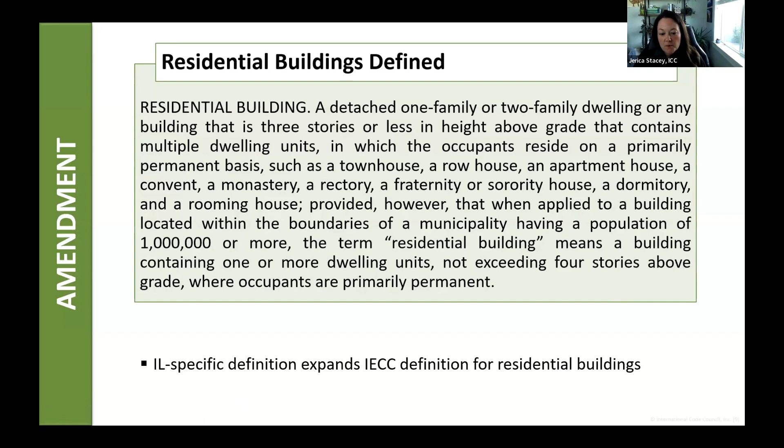When we're thinking just about the 2021 IECC, I think it's important to understand some of the energy savings and emissions reductions that we get just from the model energy code. So every code cycle, the Department of Energy through Pacific Northwest National Laboratory and their Building Energy Codes program, they issue a determination. They look at the most recent version of the energy code and compare it to the previous version to assess whether or not it provides additional energy efficiency.

When we're talking about the 2021 residential provisions, that determination found about a 9% increase in energy savings over the 2018 IECC and similar carbon emission reduction savings as well. So this is really important for states that do have additional energy efficiency goals or have some kind of climate action plan or other carbon conscientious policy.

And when we compare the 2021 to the 2006 IECC, which we typically use as a baseline - it's considered to be one of, if not the first modern energy code - we see about a 40% increase in efficiency between the 2021 and the 2006.

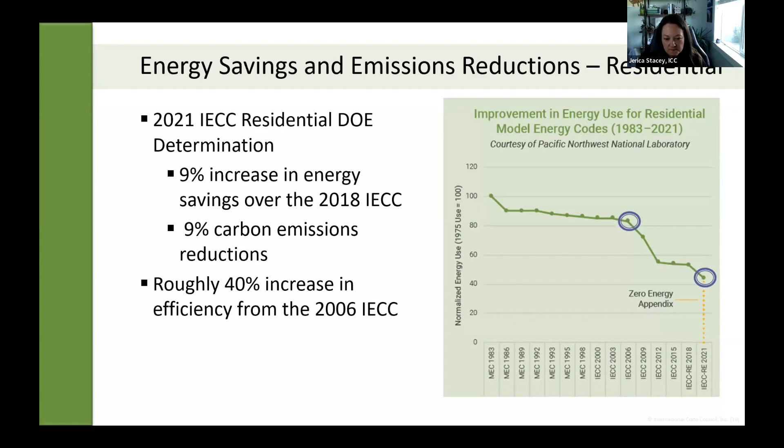Well, lucky for us, DOE through PNNL also did some analysis on the Illinois Residential Stretch Energy Code provisions as they were first proposed to be included in the residential portion of the code.

Compared to the 2021 IECC, the Stretch Energy Code will provide about 9.6% energy cost savings, life cycle energy cost savings of a little over $2,000 - we're talking about a 30-year period for those life cycle energy cost savings - and avoided future retrofit costs of about $6,500.

So those retrofit costs are going to come into play when we talk about some of the provisions that don't necessarily impact the energy use of the building, but they do impact carbon, and future owners will have to cover that cost if they were not included within the Stretch Energy Code.

So I'm going to put a link to that analysis. It's available online if you care to dig a little deeper into what that analysis says and how we're coming up with these values.

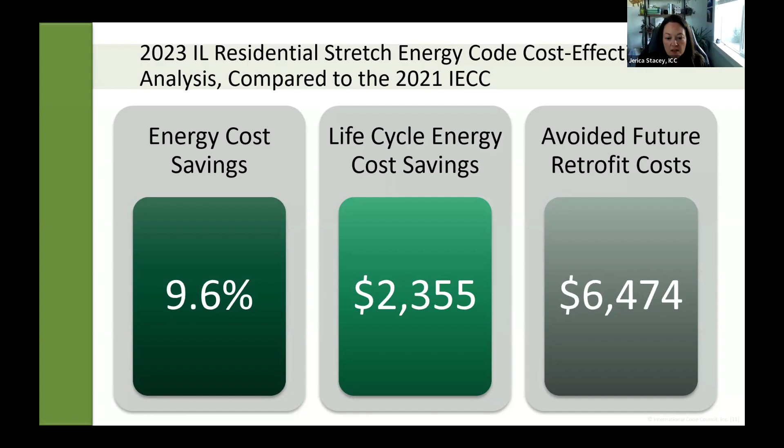In addition to those values, this analysis also estimated that over that 30-year period, the energy savings are collectively going to save about $2 billion in energy costs, and they're going to reduce statewide CO2 emissions by over 14 million metric tons, which is equivalent to just under 3.1 million cars.

That 9.6% energy cost reduction that we saw on the previous slide, that's going to equate to almost $248 of annual utility bill savings, so an average of that.

So ultimately, what this analysis shows us is that the Stretch Energy Code is going to be more efficient, it's going to result in more affordable housing, and it's going to be designed to help us achieve some of those energy efficiency and health-related goals that we might have.

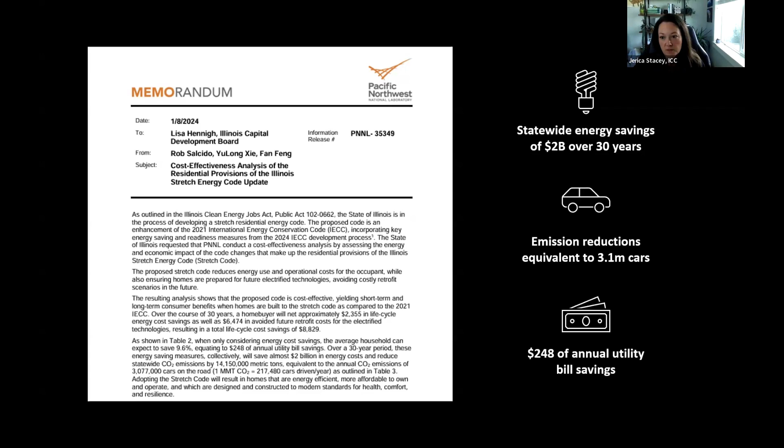And why do I think this is important? I always take my 2 minutes on a platform to discuss why I actually think that these energy cost savings have a really big impact on our community.

Every 5 years or so, there is a residential energy consumption survey that comes out. The last one, we're still getting continuous data from this currently, but in 2020, we found that about 27% of US households, which is about 34 million US households, reported some difficulty either paying their energy bills or they kept their homes at unsafe temperatures to be able to afford to pay their energy bills.

When we look at the same survey that was done 5 years previously, we do see a reduction in those households that are saying they're having difficulty meeting their energy bills. This particular survey attributes a lot of that reduction in energy costs to the continuous energy savings that the energy code provides. So each code cycle, we see those improvements in energy efficiency.

Those are having a really big impact on us across our communities in being able to afford energy, the costs associated with the energy of our homes.

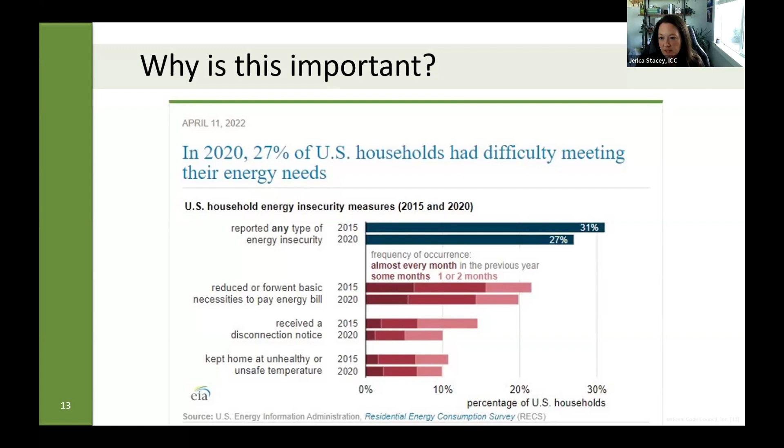A more recent study done by ACEEE found that 1 in 4 low-income households spent over 15% of their income on energy bills. And this is really a significant finding because what is considered to be a severe energy burden is 10% of your income.

So 1 in 4 low-income households are well over that severe energy burden of 10%. We see this across a number of jurisdictions in the US. Chicago was one of those, and Chicago is a little bit over that average, that 15% average we see across the US, but there are jurisdictions reporting up to 26% of their income on energy bills.

So any way that we can actually reduce that energy cost, which we can do through updating or adopting a stretch energy code, is going to help our communities be more affordable. Links to these studies are going to be in the resource section of the PowerPoint as well.

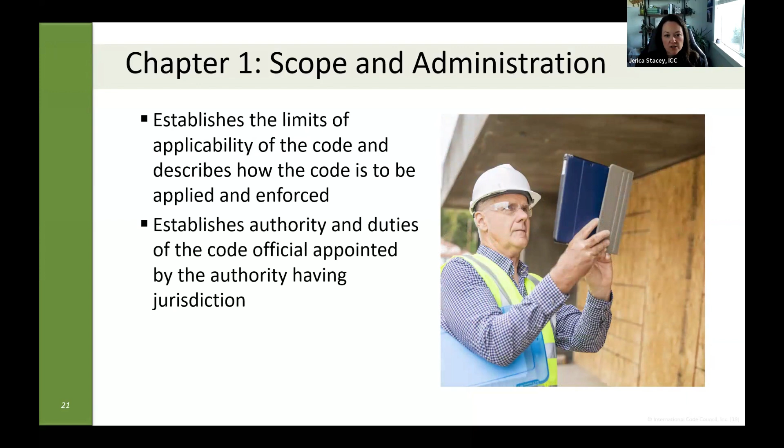So chapter 1 is our scope and administration chapter. It's going to establish the applicability of the code, so this is where you're going to find that intent section we already discussed. It's going to include details on how the code is applied and enforced, including the requirements that apply to us as code officials — what do we actually need to be looking for as we're doing our plan reviews, and what inspections should we carry out to enforce the energy code. It's also going to include those responsibilities of the design professionals, so what needs to be included on those construction documents.

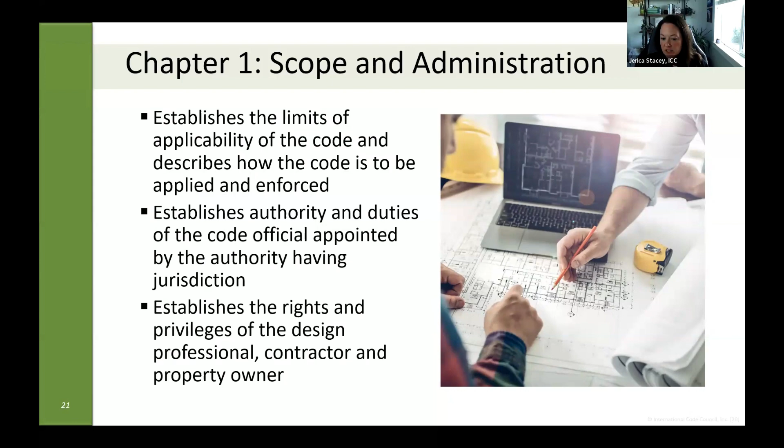There are just a few amendments to hit on within this chapter. The first is that energy code enforcement is going to be left to the authority having jurisdiction regarding the procedures it wants to use to enforce the energy code. So the AHJ, or the Building Code Department, is going to establish the procedures for enforcing the energy code, the stretch energy code, because as we already talked about, this is going to take precedence over the statewide energy code.

We also find an amendment that tells us our compliance submission options are expanded. Typically in the 2021 IECC, we would just have a list of compliance materials we can include — worksheets we're used to, computer software printouts, manuals, analysis like load analysis, that sort of thing, that we would rely on for compliance. Well, the stretch energy code says we can also accept the seal of the architect or engineer working on the project, or we can accept a REScheck compliance report. So if we are complying with the energy code using the prescriptive path, we can already submit a REScheck compliance report to see that total UA, but the stretch energy code is going to actually list REScheck as a compliance submission option.

We're also going to find some amendments to the above code program. Typically we would just say it's going to be up to the code official or the authority having jurisdiction to name the programs that they will allow as above code programs.

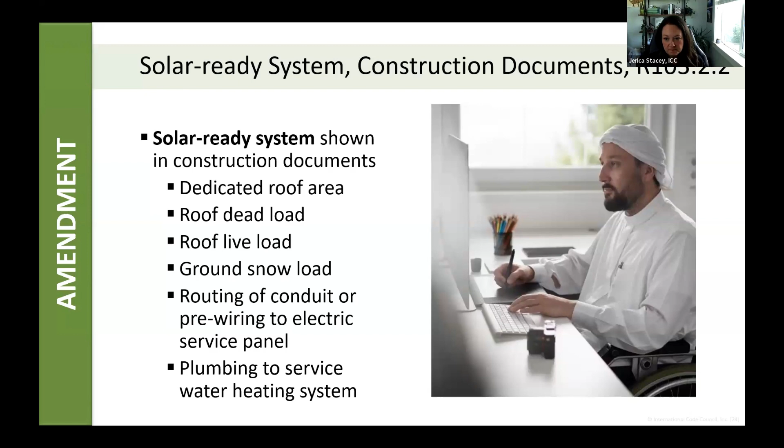So I'm kind of beating to the punchline here - we are going to require solar readiness in the Illinois Stretch Code. To support that, our construction documents need to include details about the dedicated roof area, our load details, where we're going to expect the routing of the conduit or that pre-wiring, and then plumbing to our service water heating system.

To support those construction documents, we're also going to see an expansion of those required inspections, specifically related to solar readiness. We're going to find some amendments to the plumbing rough-in inspection that will require, where the solar ready zone is installed for service water heating, our inspectors to verify the pathways for the routing of plumbing from that solar ready zone to our service water heating system. We're also going to pick up a brand new inspection, the electrical rough-in inspection, that's going to capture any conduit or pre-wiring to the electrical panel from our solar ready zone. So not only on the construction documents do we need to include all the details about our solar ready zone, but we're also going to verify those through our inspections as well with these amendments.

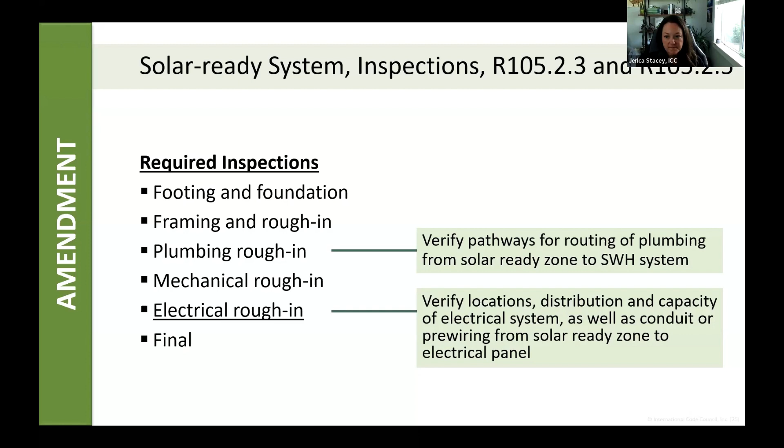Chapter 2, this is our definition chapter within the IECC and all of our other codes like the Stretch Energy Code. Definitions or terms that are defined within the IECC are going to be italicized. We see that in the Stretch Energy Code as well. Where they're not defined in the IECC, our other I-code definitions are going to apply, or the common use definitions.

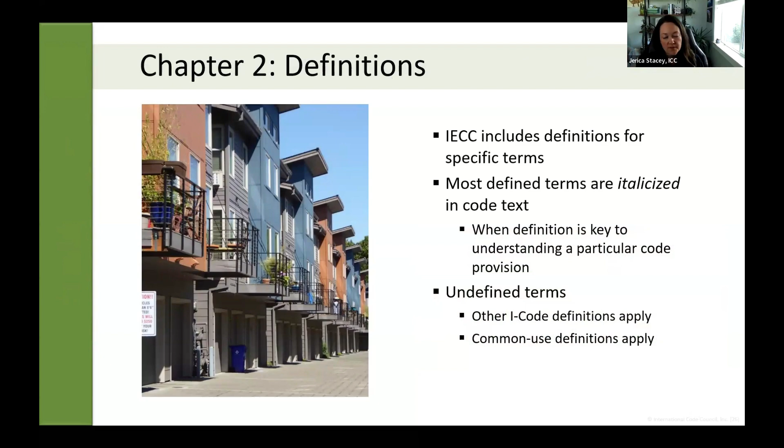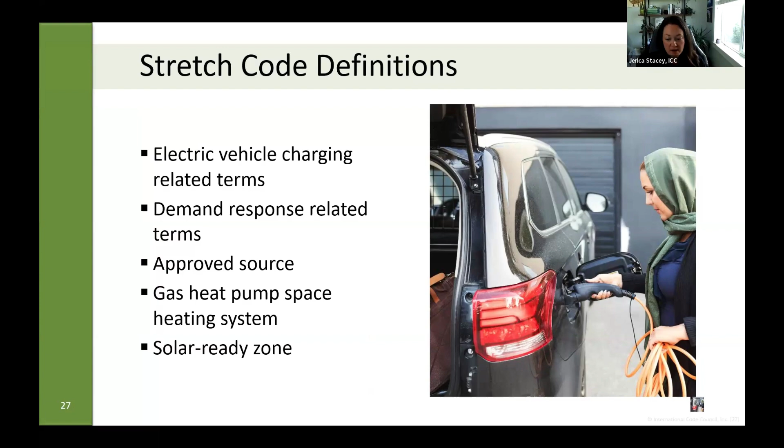I'm not going to go through all of the new stretch code definitions, but I did want to include a catch-all slide here just so that you're aware of them. We are going to have electric vehicle charging related terms, which we'll see a little bit later in today's webinar, demand response related terms, and definitions for approved source, gas heat pump space heating system, and solar ready zone.

I always say that when I pick up a brand new edition of the code, I start in the definition section because that helps me test my knowledge on how I thought a term was defined, make sure I'm still in alignment with the IECC, but also you pick up on a lot of those new requirements that are added. For example, you're going to see a lot of electric vehicle charging definitions, so you can assume there's going to be electric vehicle requirements within the body of the code.

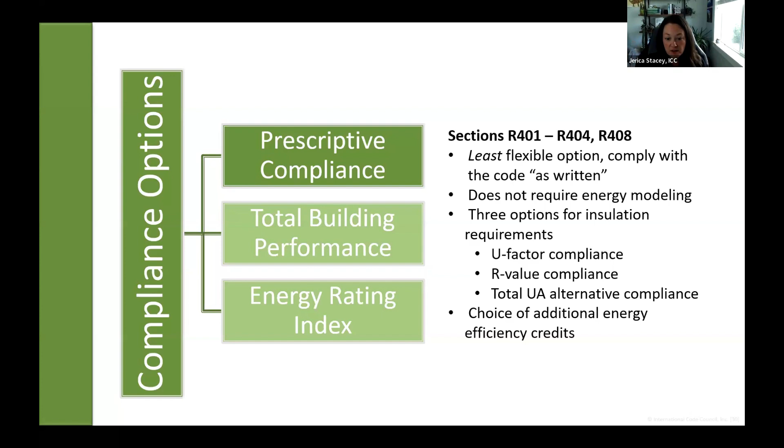Total building performance, you're going to just go to section R405. Within that section, you'll find all of the requirements needed to meet total building performance compliance. This is a more flexible option than prescriptive compliance because it considers trade-offs within more of the building systems - heating, cooling, mechanical ventilation, and water heating. It does require energy modeling, and your compliance is going to be based on that table of mandatory measures.

You're going to have a building thermal envelope backstop, meaning a threshold that your building envelope cannot perform worse than. And then we're going to look at the site energy use of our proposed building compared to the site energy use of a standard reference design.

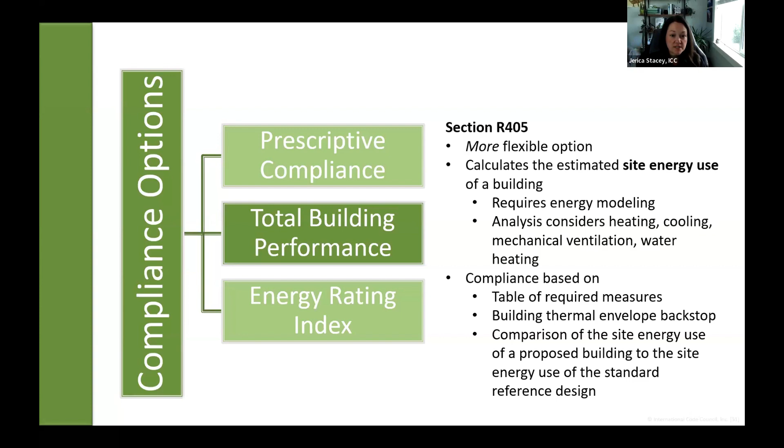And finally, we can choose energy rating index. This is what we typically consider the most flexible option because it's looking at the energy efficiency of the entire building. It expands beyond what we see in total building performance to include things like our lighting, our appliances, orientation of the building, that sort of thing. It also requires energy modeling.

Compliance is going to be based on that table of mandatory measures, just like we see in total building performance, the same building thermal envelope backstop, and then a maximum energy rating index. One significant change in the stretch energy code is that we have an ERI value both with and without combustion equipment, which we'll talk about a little bit later. The one thing that really sets this compliance path apart is that it requires a third party.

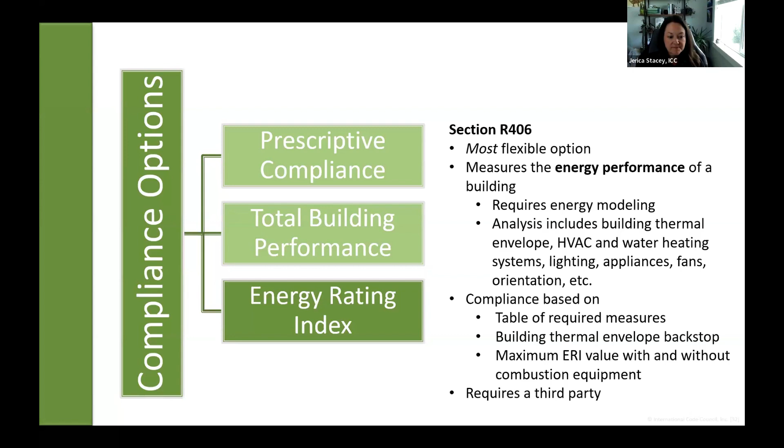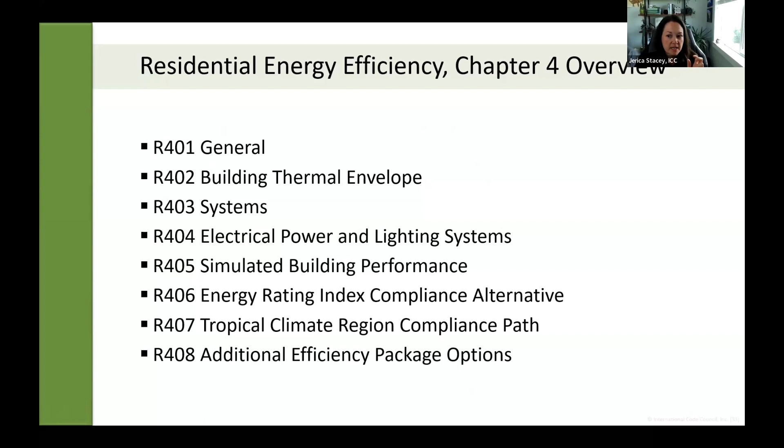All right, chapter 4 is going to be outlined like this. We have a general section, and then we have a section for each of our systems. Then we really get into those very specific requirements based on the compliance path you've selected for your project. So we're going to first talk about the prescriptive requirements, but you'll see most of these are also required for our other compliance paths because they are included in that list of mandatory measures.

So the first significant amendment we're going to find is for demand responsiveness. We're going to see this both for thermostats and for water heating. This requirement essentially makes it so there is a demand response control on your thermostat and on your service water heating system that allows building owners or homeowners to participate in a demand response program.

The way those demand response programs work, you sign up to use it. There is some kind of signal that is sent out in response to either a power outage, a system issue on the grid, or some other reason - perhaps we just need to slow the energy pull supply during a period of time. A demand response signal is sent out to those participating in the program, and then your thermostat or water heater or whatever is connected to demand response is going to adjust in a way that helps lower that energy use.

Typically, folks that participate in a demand response program are financially incentivized - there's some kind of monetary incentive for participating. There are also a lot of benefits to demand response programs.

We see fewer blackouts and brownouts. I happen to live in an area where we have brownouts all the time, to the point where we have backup power supplies to all of our major appliances because we've replaced our dishwasher 3 times in the last 6 years, because of brownouts specifically.

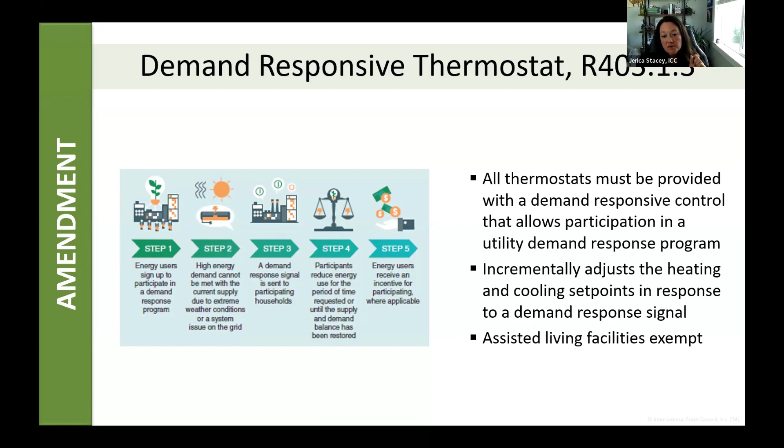When we're talking about a demand response thermostat, the requirement within the stretch energy code is that we adjust the heating and cooling set points in response to that demand response signal incrementally. It'll be 1 degree, 2 degrees, 3 degrees, 4 degrees until that demand response signal is ended. Then once it's ended, your thermostat's going to go back to the set points you had it set at. For this particular provision, our assisted living facilities are going to be exempt.

For demand responsive water heating, this is going to apply to our electric storage water heaters, and gallon size and kilowatt size is going to determine whether or not you're going to have demand responsive controls. This is again going to adjust the set point. The standards we have associated with the demand response water heaters are going to ensure that you can still meet your hot water demand.

So it's not that we're getting you in a situation where the whole family can't take a shower. It's going to adjust the set points, but in a way that you will hardly even notice. Water heaters in particular play an important role in demand flexibility because they have that inherent thermal storage that's going to allow energy consumption to be shifted with little impact to us as end users.

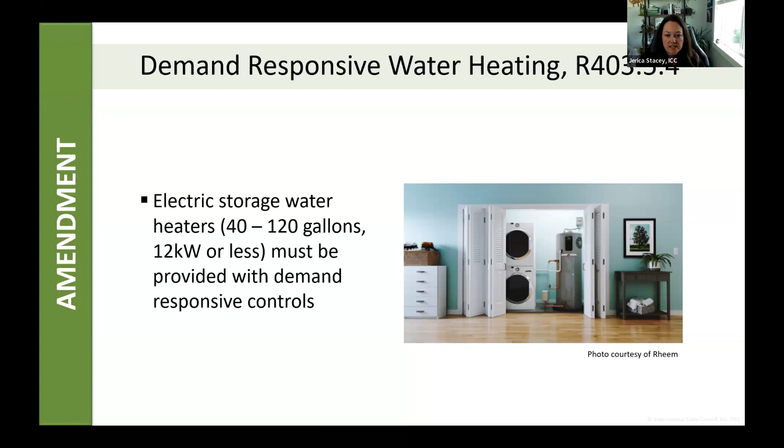We are going to require that 1 and 2 family dwellings and townhouses that have an attached or detached garage must also have an EV ready space. What you're not seeing here is how we handle those other occupancies other than 1 and 2 family dwellings that still fall under the residential code - those are going to comply with the Illinois commercial energy stretch code. We'll talk about that on Thursday. But for our 1 and 2 family dwellings, you have to have 1 EV ready space. This particular requirement supports the CEJA goal of accelerating electric vehicle adoption and expanding charging station infrastructure.

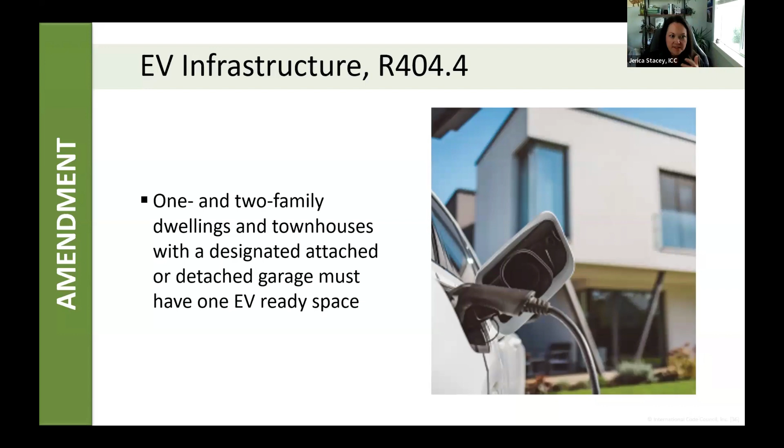So I know what you're thinking: what is an EV ready space? That is one of the new definitions we get in the Stretch Energy Code. An EV ready space is an automobile parking space provided with a branch circuit and either an outlet or enclosure for connection to EVSE. The EVSE is the whole thing connected - it's ready to plug into your car. You're ready to go.

Another significant amendment we're going to see is electric readiness. This provision ensures that a home built with appliances running on fossil fuels can easily accommodate future electric appliances and equipment. There's nothing here that prevents a homeowner from having a gas water heater or gas stove or whatever the case may be. We just want to make sure that where gas is selected, enough electric infrastructure is there so the next homeowner, or that current homeowner who wants to swap out equipment later, can do so without retrofitting the building. This is one of those provisions where we're looking at future retrofit costs and the savings associated with that $6,500 in retrofit costs later on. It also helps support a CEJA goal of equitably supporting communities that face energy transitions.

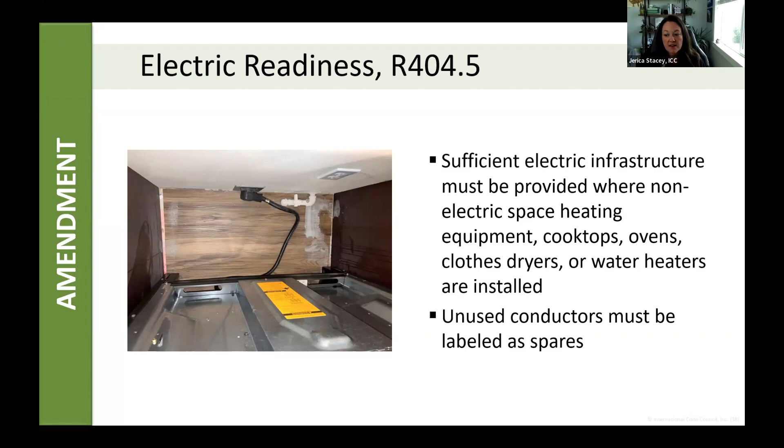Our 1 and 2 family dwellings and townhouses are going to have some dedicated space for future PV systems. This is that solar ready provision I was talking about, where we're also going to include it on our construction documents, and we're going to be inspecting for it when we're in the field. We have to have a dedicated roof surface for future installation of PV.

Just like we saw in the EV charging requirement, all other occupancies that fall under the residential definition are going to go to the commercial Stretch Energy Code requirements. This really just allows us, during the time of construction, to put in all of the infrastructure we're going to need to install a solar system later on. So we don't have the cost up front right now, but we do have the entire infrastructure there - an unobstructed roof, spaces where the conduit and plumbing can be routed, that sort of thing. We want to make sure everything is ready so that we can have a PV system in the future.

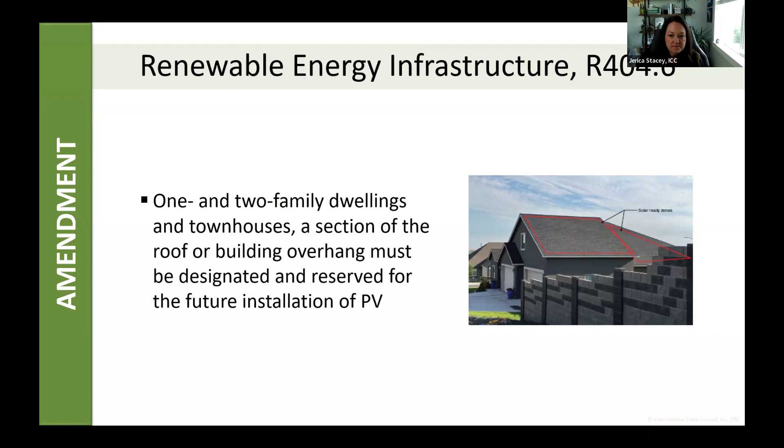The last significant change we see to the prescriptive provisions is a change to our additional efficiency requirements, section R408. This was probably the biggest significant change in the 2021 IECC base energy code, and I'd say one of the most significant changes to the Illinois stretch code as well. We essentially provide two options for meeting the additional efficiency requirement: the heat pump equipment air tightness option or the additional efficiency credit option.

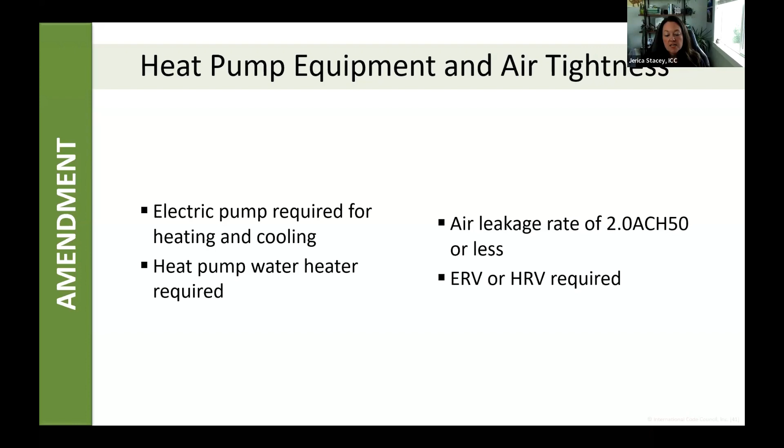For projects that want to go the heat pump equipment air tightness route, you are going to have an electric heat pump for heating and cooling and a heat pump water heater. In addition, you'll have to have an air leakage rate of 2 air changes per hour or less, and because that rate is so low, you'll also need an ERV or HRV. The 2021 code already requires an HRV or ERV in climate zone 7 and 8, expanded in 2024 to include zone 6 as well. So we're already seeing these requirements anyway. But when you take this route, since your air leakage rate is 2 or less, you must have an ERV or HRV installed that meets the minimum sensible recovery efficiency, or SRE, of 70%. You also need to make sure that SRE value is included on the documentation.

You can choose from enhanced envelope performance, more efficient HVAC equipment, reduced energy use in service water heating systems, more efficient duct thermal distribution systems, improved air sealing and efficient ventilation, or energy efficient appliances. If you have a larger volume home, 5,000 square feet or larger, you'll have to achieve 5 additional energy credits, for a total of 35.

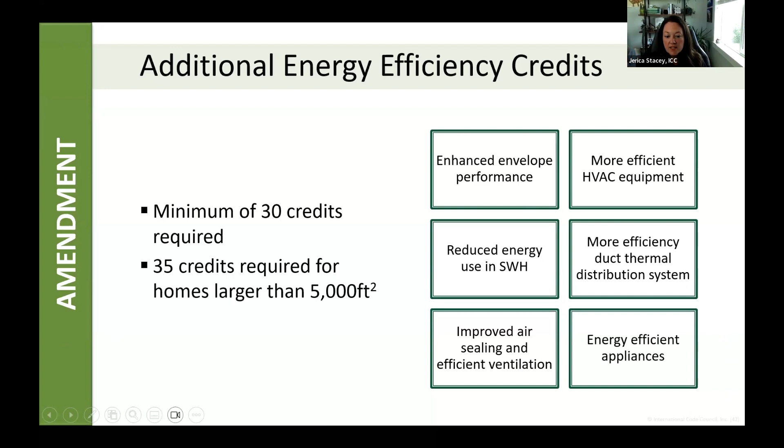Within each of those measure categories, we actually have several options listed to achieve these credits. The whole concept of moving to a credit option is to make sure we're implementing items within our climate zones that make sense for those specific zones. We get a specific number of credits based on the climate zone we live in, but the real intent is to make sure our builders and designers have as much flexibility as possible in achieving this additional efficiency. They'll typically consult with the homeowner, who may favor some measures over others for reasons like utility incentive programs. This really just gives our designers, homeowners, and builders an extreme amount of flexibility in how to achieve those additional efficiency requirements.

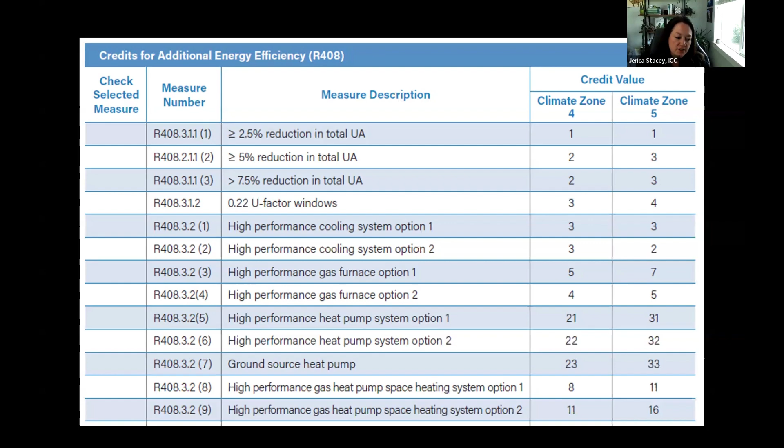So those are the significant changes that we see throughout the prescriptive compliance path, and we're going to see those brought into our other compliance paths as well.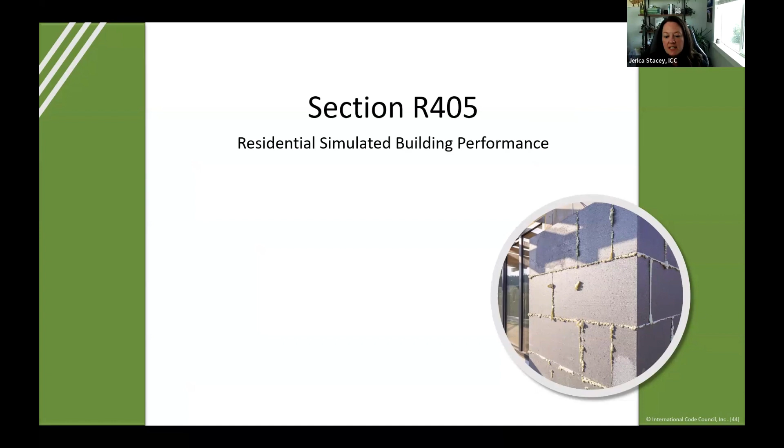So when we're talking about section R405, this is our total building performance. It's called simulated building performance in the 2024, which is why I have accidentally labeled it that way in this slide. We kind of bounce back and forth between those two terms. In the stretch code, it's called total building performance. Section R405, this is our performance option.

We talked a little bit about how it's more flexible than prescriptive. We do have to meet the mandatory requirements in table R405.2, the building envelope backstop requirements, and our site energy use requirements. So what do these look like? These are really what I consider the foundational requirements of this section.

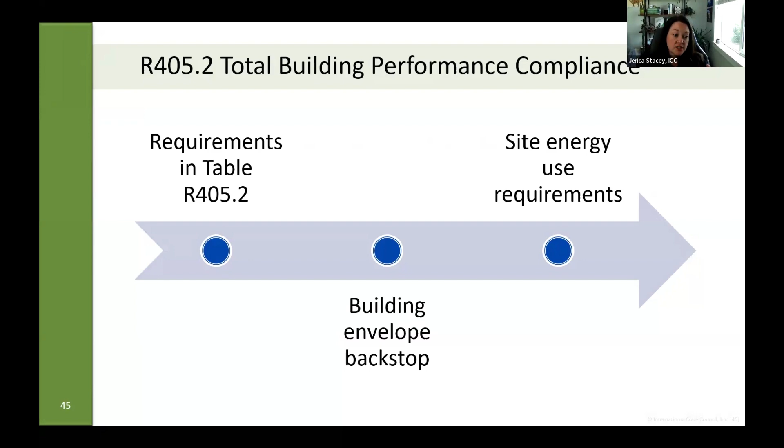And we do have changes to each of these in the stretch code. So the first is just an updated mandatory requirement table. This is a screen grab from what you'll see if you use Digital Codes Premium. You can see that the blue means that it was added in the 2021. It wasn't really added in 2021, but the table itself was added in 2021, which is why everything shows up blue.

But the red is specific to the Illinois stretch code amendments. So you can see here, even though those showed up in the performance or in the prescriptive path, that our EV infrastructure requirements, our electric readiness requirements, and our renewable energy infrastructure requirements or solar readiness are also going to apply to our projects if we're using total building performance.

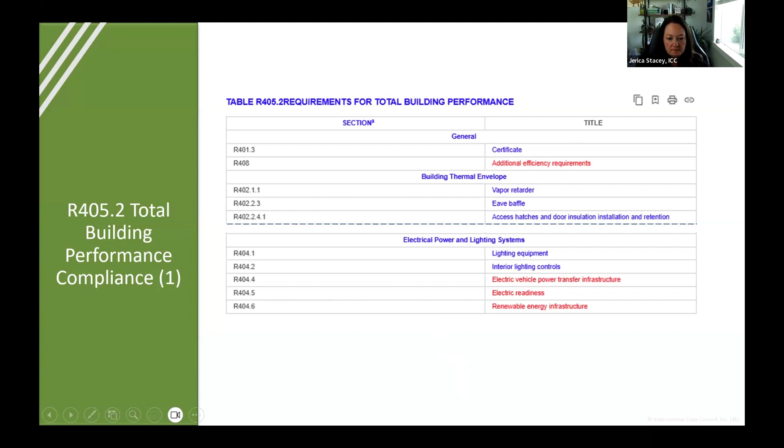The other change to this compliance path is an update to the backstop. So in the 2021 base code, our envelope backstop, meaning the minimum performance of our building thermal envelope, is going to be the 2009 IECC.

We've updated that backstop in the residential stretch code. Now what it is, is a multiplier of 1.1 or about 110% of the UA of a prescriptive project, meaning we're going to look at the U factor. We're going to multiply that by the area for each of our building thermal envelope assemblies. We're going to total that all up, and that will be the UA of our prescriptive design. Our proposed design has to be that UA times 1.1 or less. So we essentially get about 110% that we can play with for our building thermal envelope.

And this is really important because it keeps us from having to reference older versions of the code. And as the stretch code improves, or the next iteration of the stretch code, you're going to be using those UA requirements that are built into the stretch code itself. So there's no longer any need to go back to previous versions of the energy code.

And this also allows you to make up for that efficiency somewhere else within your building. So we're not requiring you to have the exact same building thermal envelope as you would if you were complying prescriptively. So there is an element of trade-off here. You can make up for that in your heating, cooling, ventilation, whatever it may be. However, we do still want to make sure that your building thermal envelope is a very well-designed, very well-performing envelope.

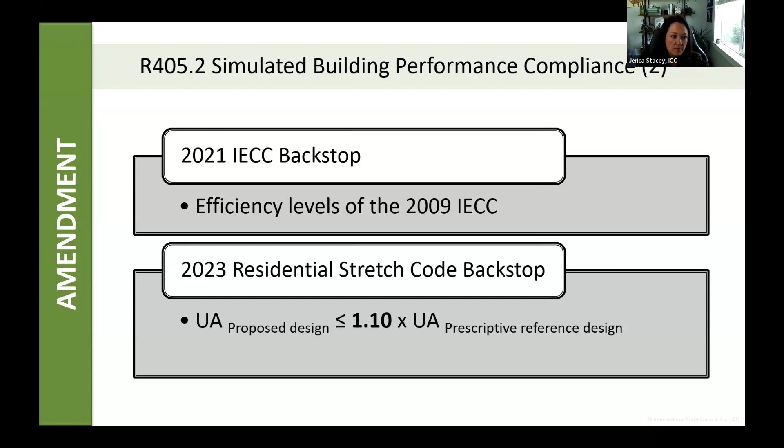And finally, the site energy use of our proposed design has to be 71% or less of the site energy use of the standard reference design. So this is a little bit different for those of us that use the base energy code. Typically, when we're talking about total or simulated building performance compliance, we're talking about energy cost. This is a compliance path that compares the energy cost of our proposed design to the energy cost of our reference design. However, the stretch energy code is going to change that metric from energy cost to site energy.

And that's so that we can help meet those CEJA site energy index reduction goals. So we want to be looking at the same metrics that we would be looking at to meet those CEJA goals.

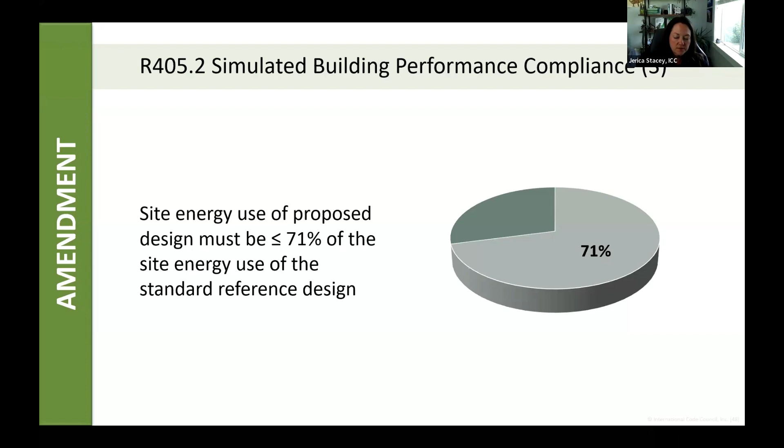And the final compliance path we have is section R406. This is our energy rating index compliance path option. To comply with this, well, I guess to back up a little bit, this compliance option is looking at the energy efficiency of our building. So it's not looking at site energy use the way that total building performance is. It's looking at the energy efficiency of our building.

And typically this is looking at loads. That's essentially what the energy rating index is looking at. This is going to be a scale from 0 on up, where a score of 100 means that you meet the 2006 IECC compliance, and then a score of 0 means you have a 0 energy building. Each 1% reduction in energy is going to be a 1 point reduction on this index. Meaning if you have a home like the one on this certificate, where you have a score of 45, you're performing 55% better than a home that's built to the 2006 IECC.

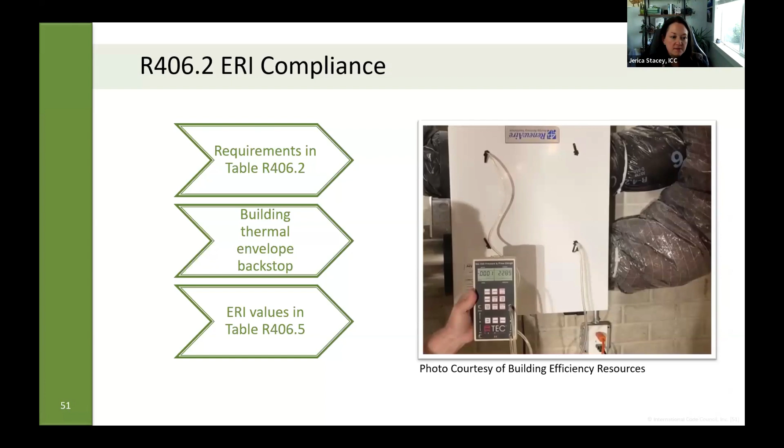There are a couple significant changes within this section. First, we need to comply with the mandatory requirements table. You're going to have the same building thermal envelope backstop. So for both that mandatory requirement table and that thermal envelope backstop, those are going to be the same as we see in the total building performance. I'm not going to cover those changes again since they're the exact same. And then we also have to meet the energy rating index values in table R406.5.

The big difference between the 2021 IECC and the Illinois stretch code is that we have 2 ERI scores to achieve, depending on whether or not we have combustion equipment in our project. If we have essentially an all-electric home, our ERI score in climate zone 4 is 54 and climate zone 5 is 55. We do have a reduced ERI score if we have combustion equipment - any kind of gas water heater or gas space conditioning equipment. We're going to have to improve the energy efficiency of our building by 3 to 5% if we have combustion equipment installed.

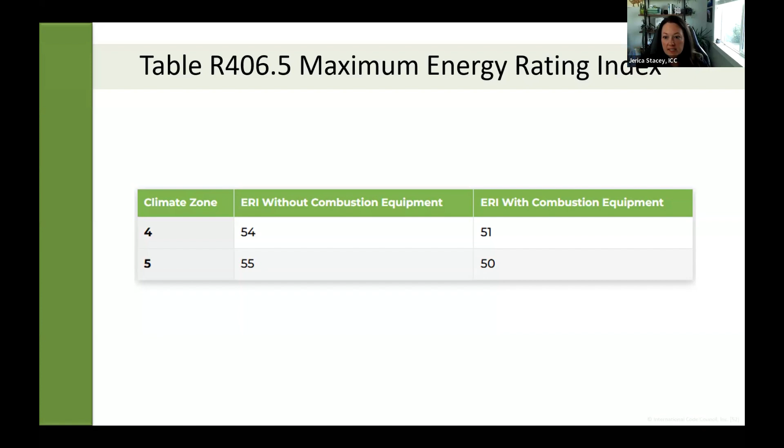My next couple of slides, which will be available in the handout, are just listing those resources that I've already talked about.

One additional resource I wanted to point out was the Midwest Energy Efficiency Alliance. You're probably familiar with their work, but they also support the Building Energy Hub, and they've partnered on some of the resources I mentioned and that Katie's going to mention. All of the links I dropped in the chat, as well as some of the other studies, will be available in the resource section.

And I am going to turn it back over to Katie to finish out the presentation, and she will facilitate the discussion of any questions you may have had while we went through those amendments.

Thank you so much, Jerica. Very thorough - I learned a lot of things, so I hope everyone else did as well. Jerica shared a lot of great resources.

I'm just sharing a few that are linked on the Building Energy Hub website as well, including the guides created by ICC earlier this year for the stretch code. There's also the compliance checklist she mentioned, showing a few tables from those - that's a longer version, but definitely worth looking at if you want to go line by line through what's changed. And if you want a short, quick version - a commercial stretch code primer or residential stretch code primer - CDEC has some great resources too, more like a 3 or 4 page version versus a 7 or 8 page or 20 page version. So you have all the different ways to learn about the stretch code through the links on the resources here, as well as what Jerica shared.